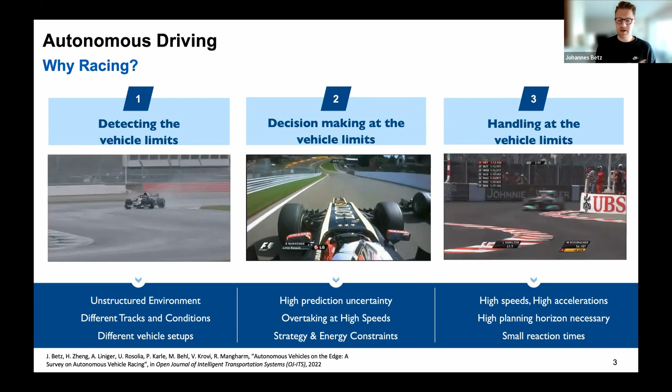Number 2 is decision-making at the limits. You see here an overtaking maneuver at a very famous racetrack, Spa-Francorchamps. And you see the car is doing this left-right overtaking maneuver at 270 kilometers an hour. You have high prediction uncertainty because you don't know what the other car is doing. You have to take care of strategy and energy constraints. And finally, in the third image, you see the car handling at the limits. You see Michael Schumacher driving in Monaco. You have only these small reaction times, and if you miss a spot or you miss to steer the car exactly around the turn, you will hit the walls. And if you combine all these with autonomy, you have some very, very interesting problems.

And a few other people had the same idea, and they set up the so-called Indy Autonomous Challenge, where the goal is to race fully autonomously against each other. These are all the university teams that took part in that. And at the end, there was a $1 million first prize. We had 2 races, one in Indianapolis, a single vehicle one, and 1 race in Las Vegas. The car that was given to us is the Indy Lights car. This is a normal race car chassis, but it was fully made autonomous because it had integrated GPS, a radar, a LiDAR, and a camera, and as well some computation power. So this was the hardware that was given to us. And now there was the task for us: let's drive autonomously and let's race autonomously.

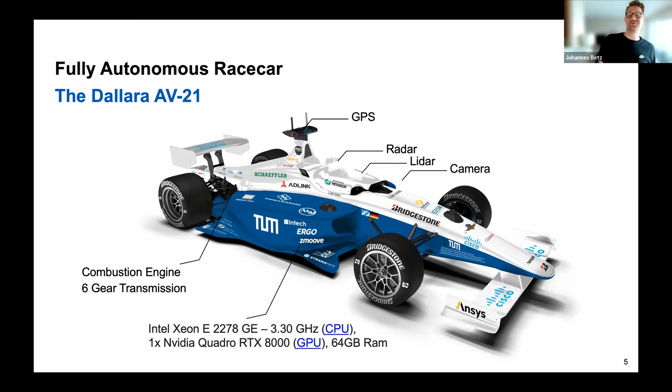And we start with the first one, it's the localization. So you know that an autonomous vehicle needs to figure out where it is in the world. In our case, we were fusing the data from GPS, IMU, LiDAR, and a specific track layout. This is very normal to what you know from a normal autonomous driving vehicle, but you see some add-ons here, especially the boundary detection and the track layout.

So we were able to use this information we have gathered before about the track layout and use that in our localization technique. The second thing you see here is that the car is mainly relying on GPS. That's our number one localization technique. In the car, we had a differential GPS, which gives us a good accuracy, but on the racetrack, we had a lot of dropouts of the localization of the GPS.

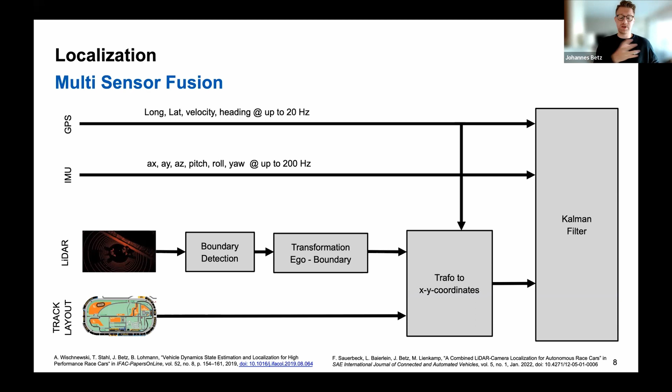So what you see here is basically a redundancy of sensor data that is fused together to be as accurate as possible. And I'm talking here about 2 to 3 centimeters, because less accuracy gives us less planning accuracy in the end, and that's bad for a race car. So the differences here to a normal autonomous driving vehicle are basically the LiDAR information and the track layout, which was gathered before. Then we are moving on to the second part, the object detection.

The object detection is basically something that is very, very similar to what you know from a normal autonomous driving vehicle. In our object detection pipeline, we have a late fusion technique and a tracking technique that you know from normal autonomous driving vehicles, and the pipeline is using LiDAR, radar, and camera data.

First of all, when we have the LiDAR data, we were running a PointRCNN deep neural network that was trained on this LiDAR data, and we're running an additional clustering and matching pipeline. With this, we have a close range detection of all the objects that are in front of us, as well as a safety pipeline when something drops out. The radar is used for long range detection of all the obstacles, and the camera is a secondary pipeline.

If we put everything together, we need to fuse, because we need to do a transformation, a plausibility check, an object matching, a state estimation, and finally a delay compensation. And if you fuse all these sensor data together in the end, you will get a unified object list that has a high accuracy detection of the other vehicles. Again, this is something you find in a normal autonomous vehicle. There are no special race things integrated.

But now we're coming to a more interesting part. We know now where the car is, and we know where the objects are around us. Now it's getting a little bit more interesting, because now we're coming to the specific autonomous race components. What I show you now is our idea or our method behind the prediction of other obstacles. The highest complexity occurs when we need to correctly predict the other race cars' trajectories.

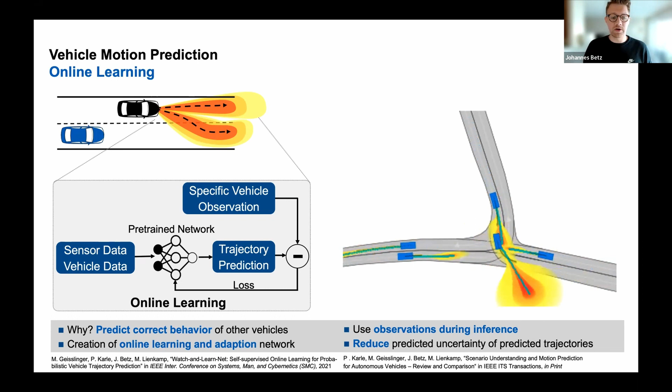And based on current observations, we retrain the deep neural network and therefore basically overfit to one specific vehicle and its driving style. With this, we now have the possibility to predict complex opponent behavior online with less uncertainty. And that's exactly what we need in an autonomous race car. Because now we are coming to the most important part of an autonomous vehicle, and that's the planning part.

So everything you've seen before is very standard, or adapted from a normal autonomous driving vehicle. But the magic and the heart of an autonomous race car is the planning part. Because here we decide the vehicle performance. Here we decide where the car is actually driving. And here we're running the safety assessment of whether a trajectory is good or not. And this part takes a little bit more time because we have a lot of components here.

But firstly, I want to share with you how we can model the vehicle dynamics more efficiently and accurately to know and estimate the vehicle performance. Because we need to know in every time step what the maximum lateral tire forces are that we can apply. Normally, we create a physics model of our vehicle, which is implemented with a handful of differential equations. That's what you see here on the left side. By knowing the vehicle parameters, the vehicle states, and the control inputs, we can estimate the vehicle dynamics behavior for the next time steps.

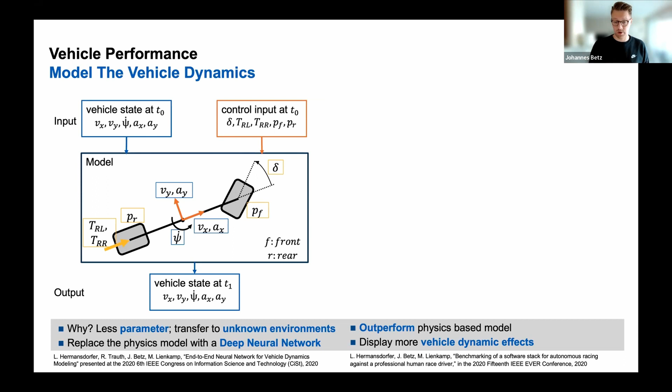Unfortunately, we need a lot of parameters which need to be really accurate, and we can only approximately and explicitly model effects with this physics model. So on the left side, you see now that we replace this physical model, the differential equation, with a deep neural network. We chose a recurrent neural network architecture as the main architecture, defined the hyperparameters and gathered data on the vehicle and in different environments to train the network.

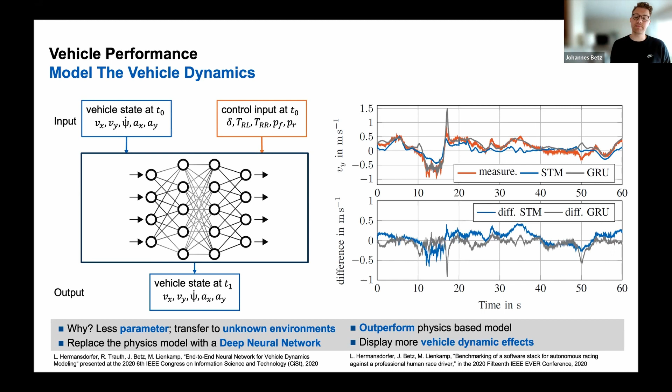So what you can see on the right side here is a comparison of the lateral velocity estimation from the physics model in blue and the neural network in gray. And we were able to show that with the right architecture, we can outperform the physical model, transfer more easily to new environments like racetracks, and display the nonlinear vehicle behavior much better and faster. And with this algorithm, we now have the possibility to estimate the correct vehicle dynamics in every environment. And that's what we need.

Secondly, by knowing now how our vehicle might behave for the next time steps, it's time for us to identify the absolute limits the vehicle can drive on. This limit can be displayed with one value only, the friction coefficient. The friction coefficient displays the contact between the tire and the road, and it's basically the value that defines for us the maximum lateral and longitudinal acceleration the car can drive on. Unfortunately, you cannot directly measure this friction value.

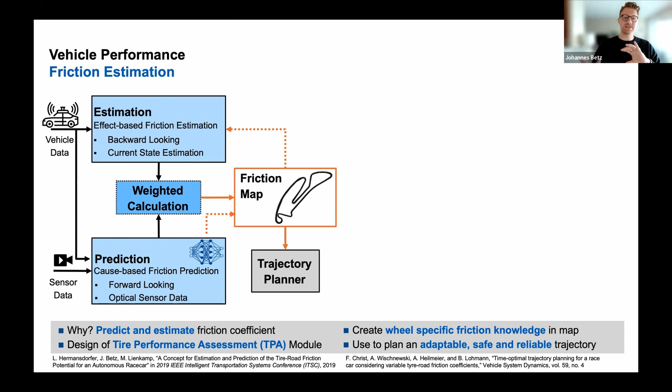So on the left side, you can see our approach to define this value, which we call the tire performance assessment module. We were using two different software modules for that. So first, we estimate the value based on a physical model, state estimation and vehicle sensor data. And secondly, we can predict the value for future time steps by using vehicle camera and sensor data and a convolutional neural network. Afterwards, everything is fused together in a friction map.

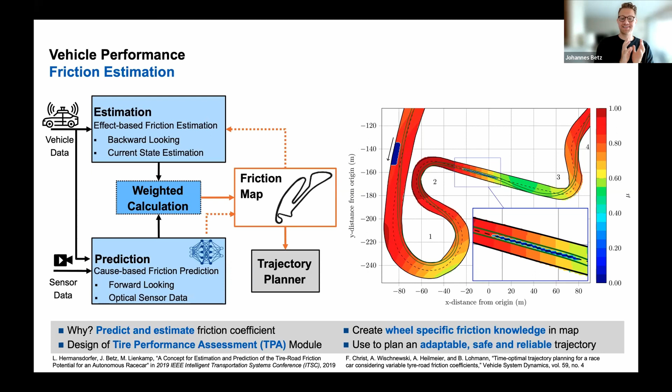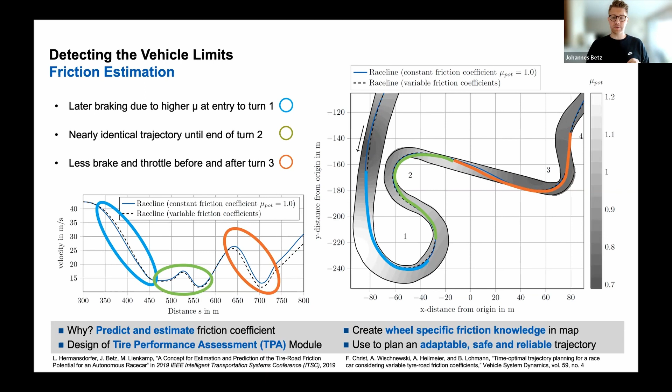For example, we have the same trajectory in turn number 2, and we have less braking and throttle because of a low friction area in turn number 3. So what you can see here is that the speed of the car is heavily dependent on this friction coefficient, and we needed to calculate it correctly. Furthermore, we need this friction coefficient afterwards to calculate our global optimal race trajectory.

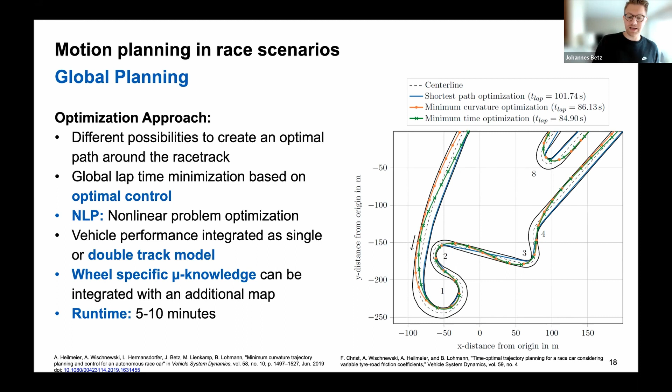But afterwards, you get this global optimal race trajectory, and you know if you run this, you are the fastest car on the track. But ultimately, it comes down to the car when we want to drive online. The local planning is a non-convex problem due to the multiple agents we have around us, which means we need a trade-off between a high-quality solution and the global optimum, and it is required that everything works along the full vehicle dynamics range. In our case, we decided to go for a multi-step approach here.

First of all, we apply a local search of a trajectory with a sampling-based graph search. This is an efficient implementation, and we can set up arbitrary cost functions. And ultimately, if we found a trajectory which we say is a good one to overtake, for example, we do a local optimization with a tube MPC approach to refine the solution up to a centimeter level.

And with this one, we can handle the disturbance and uncertainties. And just remember in the beginning, when I showed you the video of Michael Schumacher driving in Monaco, this is exactly where we can achieve this behavior.

So first, the local planning is done with a graph search approach. Our goal is to drive in all environments with other obstacles around us, no matter how complex it is. This means we want to have a feasible and a dynamic trajectory that drives the car reliably and safely. So on the left side, you can see our idea of a so-called graph-based trajectory planner, which is split into an offline and online part.

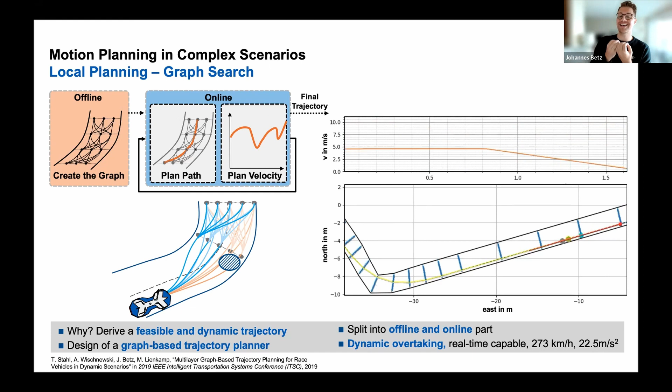This planner is real-time capable and was tested at a speed of 273 kilometers an hour on a real car with a maximum acceleration of 22.5 meters per second squared. And with this algorithm, it was shown that we can calculate a feasible path in complex and dynamic trajectories. And ultimately, now we know where we want to drive.

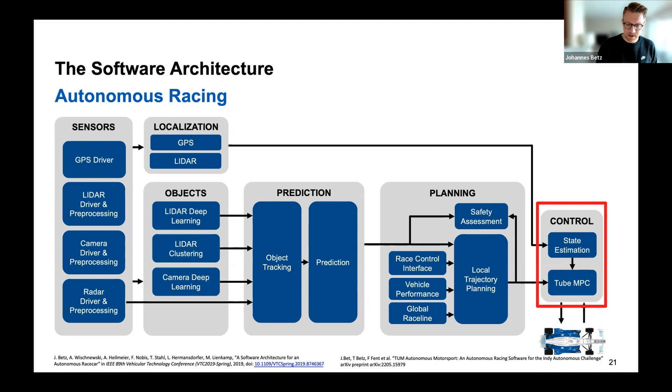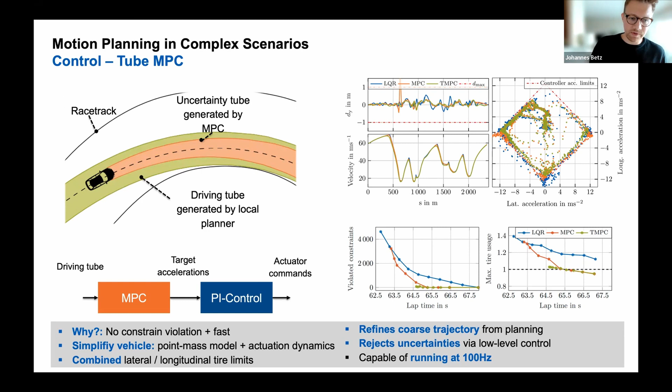Ultimately, we have tested one more solution. This one did not make it to the car, but I wanted to show it to you because we want to operate at the limits and adapt to the limits. This means we need to steer, accelerate, and brake exactly on the trajectory we have planned for. Because of control system quality and unmodeled effects, we will definitely have a gap between the planned trajectory and the driven trajectory. Since this gap is unknown and dependent on the environment we are driving in, we want to mitigate this gap.

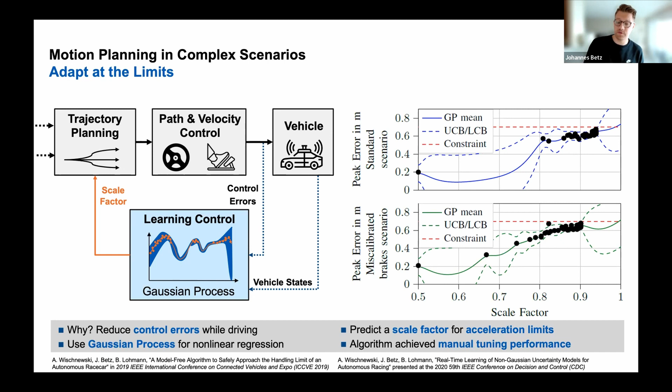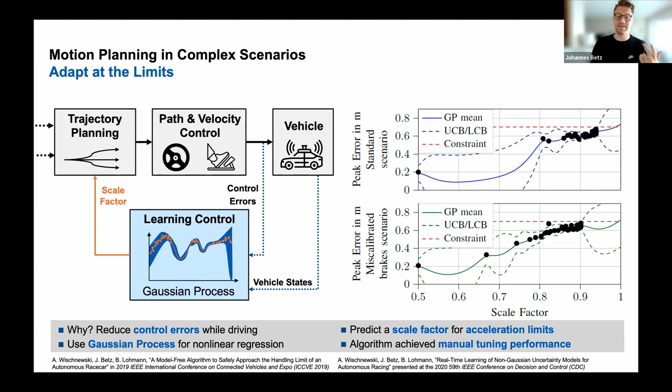So on the right side, you can see two examples of this version. The plots show the learned control error for a standard setup and a miscalibrated brake actuator using mean values in 3 sigma confidence intervals. The algorithm learns to drive the car faster each lap. It adapts with the scale factor so that we can drive faster and move slowly to the set constraints while keeping the car stable. And with this algorithm, we now have the possibility to reduce the control errors while driving and adapt our controller to the environment where we are.

And with this, I have now finished the display of our complete software architecture to race autonomously. And of course, there might be some other approaches that you can use here too, but this is basically the result of 5 years of research, what you see here. But now we are coming to the final part. Just because we have the software ready doesn't mean it runs on the car, because now it's time for us to figure out how to improve the software for an autonomous race car.

For us, one of the most important components was the simulating and testing. And in the final part, I want to display the work in this field. In both videos here, you can see the exact same track, the exact same vehicle, and the exact same vehicle behavior. Once in simulation on the left side and once on the real track on the right side.

By defining 2D and 3D environments, we were able to create automated software tests that evaluate autonomous driving algorithms and benchmark their behavior. The simulations are modeled on a sophisticated level so that we can draw conclusions for the real world behavior. Finally, all the work I just displayed was tested on real world vehicles to evaluate, verify, and validate the developed algorithms.

By connecting these individual algorithms you have seen before to our autonomous driving stack I just displayed, we were able to bridge the sim-to-real gap and derive more information about coupled effects in the autonomous vehicles. And that was something not many researchers can show, because sometimes you just display the one algorithm or isolated algorithms. And these algorithms, the software tools and automated tests helped to generalize autonomous vehicle software more efficiently, faster, and ultimately better.

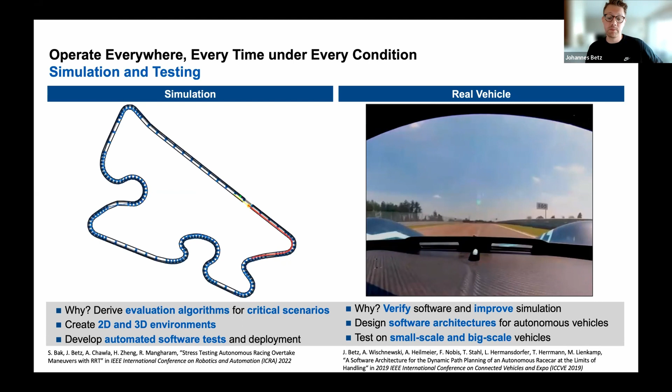So what you can see here in this image is our pipeline to optimize the models and the parameters in the software architecture. So you've seen all the software modules running together, but we wanted to optimize everything together. So what we have set up is a software-in-the-loop execution on a cloud computation platform that runs our simulation environment, runs a performance evaluation, and then runs an optimization technique, a gradient-free one with the Nevergrad toolbox, and then optimizes model parameters based on scenarios.

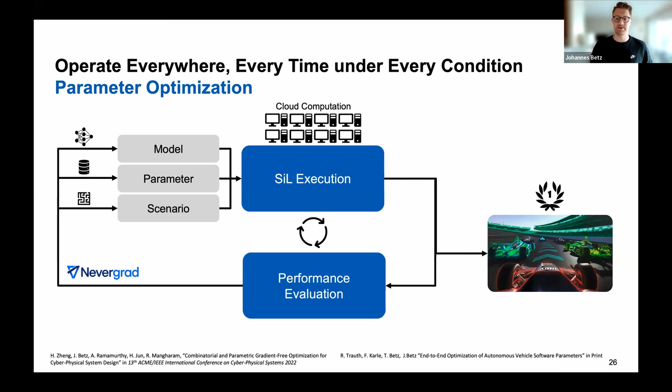And just as finally two examples, this one here is one of the videos from the Indy Autonomous Challenge that runs the Indy simulator. And you see here now, the complete software stack of our car is running currently at 300 kilometers an hour, is running in this multi-vehicle environment, is trying to figure out its path. So with this simulation environment, we had the possibility to basically train our software, evaluate it, and make it better before we went finally and ultimately onto the real racetrack.

And this video, what you see here, is now our full autonomous driving software stack running on the real car and running against another vehicle. So everything you see here now, fully autonomously, is fully racing completely alone with the software I showed you. Here, the blue car is the car from us. The white and the green car is from our competitors. And the goal here was to overtake each other and then increase the speed.

So unfortunately, we don't have sound here, but basically the commentator is explaining that we are running up with the speeds now. And in the last overtaking maneuver, you see that the cars are going over 270 kilometers an hour. And that's quite fast, because what you see here is that the cars are doing these very stable overtaking maneuvers. It's planning the trajectory around it. It's going now to the inside, while it's on this banked racetrack of the Las Vegas Motor Speedway.